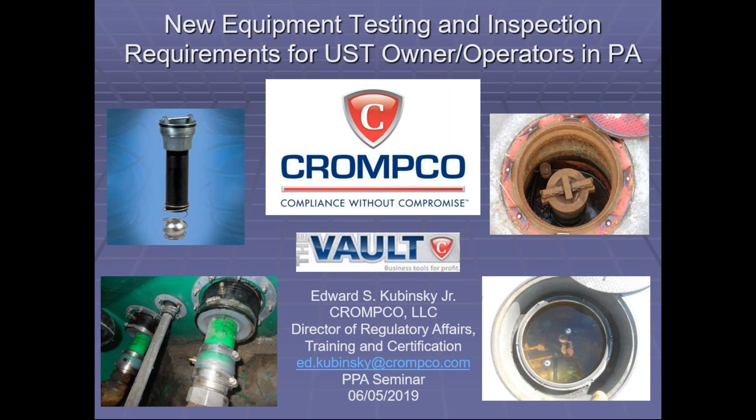All right, thanks everybody for attending. I have quite a few slides to go through here and quite a bit of information to get out to you. So we're going to be moving pretty fast through the presentation because I want to keep some time at the end for the Q&A.

And Pennsylvania is what we call an SPA state. So what that means is that Pennsylvania is authorized to implement their own underground storage tank program because EPA gave them state program approval - that's what SPA stands for - to operate or to run their underground tank program. And with the new EPA regulations, Pennsylvania DEP had until 10/13 of 2018 to revise and update their regulations to include all this new equipment testing and inspections that EPA included in their regulations.

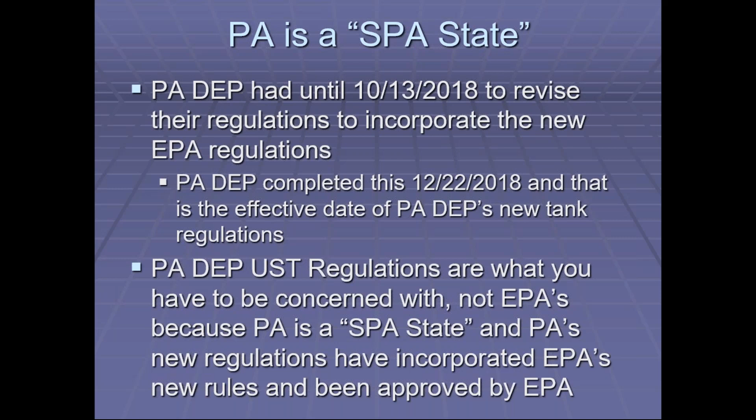A number of states - if you know anything about the regulatory process, it happens rather slowly. Pennsylvania got their new regs done and implemented on December 22nd, 2018. So just a few months ago is when the new Pennsylvania regulations went into effect. And the Pennsylvania regulations are the only thing you guys need to be concerned with. Everything that was included in the EPA regulations is now included in Pennsylvania DEP's regulations, so you don't have to worry about two sets of regulations.

Now we're going to get into it. Pennsylvania DEP's rules are Chapter 245. And the first thing I want to talk about is certified companies and certified individuals. In Pennsylvania, they have a pretty rigorous certification program for people doing work on underground storage tanks. And you as owner-operators need to know that you need to only be hiring certified companies and certified individuals to do the work. Don't be afraid to ask the company that you're hiring to provide their certification information. That should be very easy for them to do. So both the companies and the individuals doing the work need to be certified.

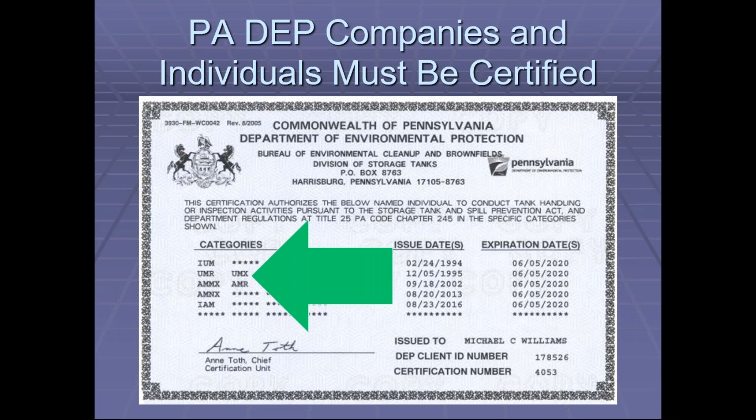This is an example of one of our individual certifications, and as you can see on the left-hand side here, there's a number of categories within the certifications that you can have with DEP, and I'm going to get into some of these important categories in a moment here.

So understanding the underground storage tank certification categories, the ones we need to be concerned with are right here with the new regs. UMX is the underground storage tank installer. UMI is a new certification category that allows an individual to do minor modifications that do not include excavation, so containment sump repairs and things of that nature that don't require excavation to do the work. If excavation is required, you need to make sure a UMX is doing the work.

UMR is underground tank remover, so if you're removing tanks, you need to make sure you're hiring a UMR individual. UTT is underground tank tester, so that's the testing category, and you'll see everything that's included in that coming up. And IUM is the underground tank inspector category, so that's the guy that comes around every 3 years and does your facility operations inspection for you.

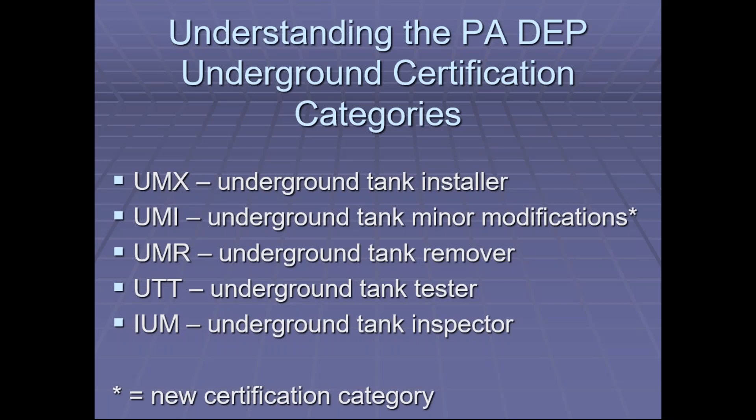The focus today is all this new testing, equipment testing, and inspections that need to be done. One thing I want everybody to be aware of is that you can go online to the PA DEP website, and you can put in your facility identification number to see what the DEP knows about your tank system.

I encourage you as owners to look at that periodically to make sure it's up to date and accurate. It's also something certified individuals can use when doing work at underground tank sites—they can see what should be at the facility and compare it to what they actually see when they're out there.

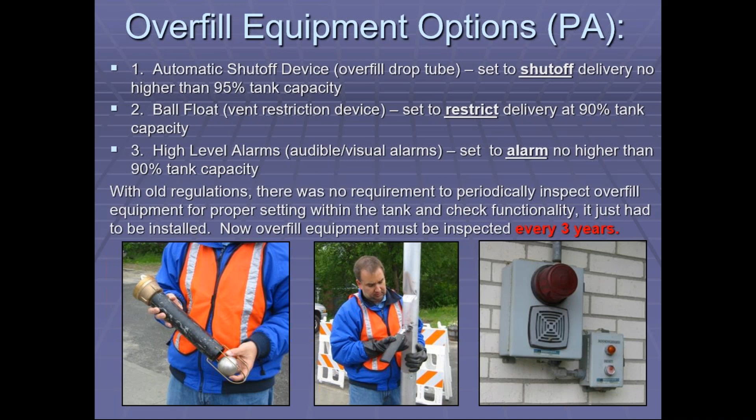Once again, overfill equipment is going to need to be inspected once every 3 years moving forward.

Here's a little picture of a tank. That first arrow is your stage 1 vapor recovery riser, or vent extractor—that's where your ball float would be installed. You can see the flapper valve, or automatic shutoff device, installed in the fill, which is where your delivery drivers fill your tanks. The high-level alarm would be attached to your automatic tank gauge, so as the float moves up, it would set off the outside audible alarm.

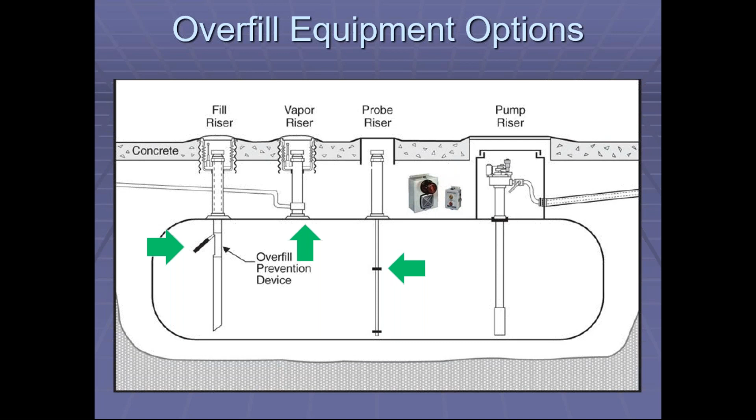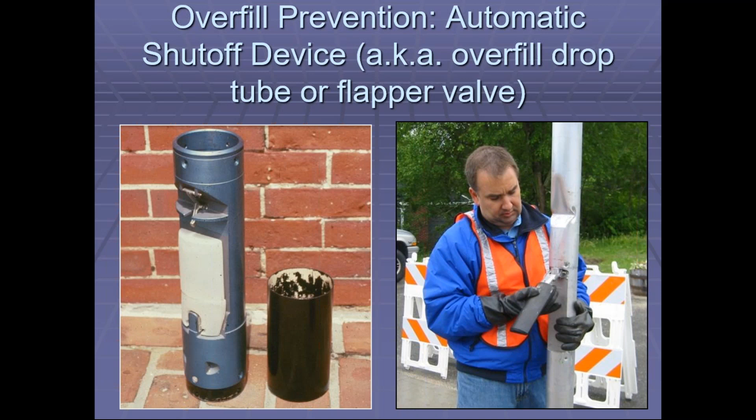So how do you inspect the overfill equipment? This is covered in Chapter 7 of PEI RP 1200. If we are doing an overfill inspection on an automatic shutoff device, a drop tube, we're going to remove and inspect the drop tube for damage. It needs to come out of the tank unless the manufacturer has a procedure for testing and inspecting the drop tube while it's installed in the tank.

You can follow manufacturer's guidelines for doing that. But we remove it from the tank and inspect it for damage, make sure the floats move freely, make sure any latch mechanisms work.

If there's a bypass valve, we make sure it's open. One of the critical parts is measuring the drop tube to make sure that it shuts off at 95% in that tank. Common problems we see with drop tubes: sticks being broken and remaining inside the drop tube. That will defeat the flapper valve. It will never work if the stick is still in the drop tube.

Improper measurements is one we see quite often as well. They're set well higher than 95% tank capacity. That would be out of compliance.

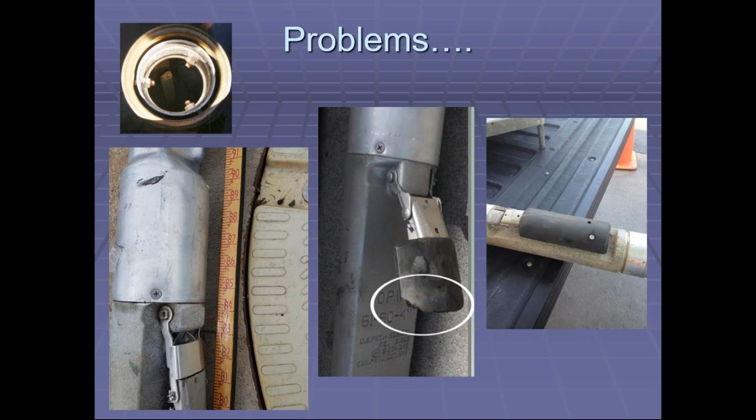And then broken flapper valves, we see them periodically as well. Here's a picture of one that was installed in a tank for only 6 months. We removed it to take a look, and as you can see, the flappers are gone, so there was never any overfill protection in that tank.

So that's kind of the reason why these inspections are being done with the new regulations, because the equipment doesn't last forever. Things break, things get damaged. They need to be checked periodically to make sure that they're still working.

Pass-fail criteria, it's pretty simple. If the automatic shutoff device functions as designed and complete product flow is shut off at 95%, it passes the inspection.

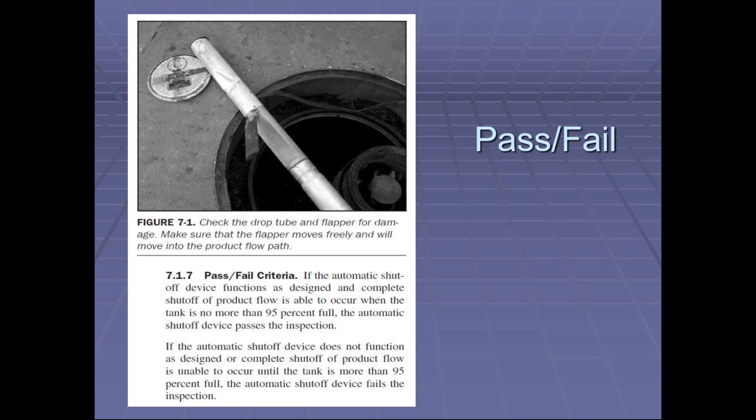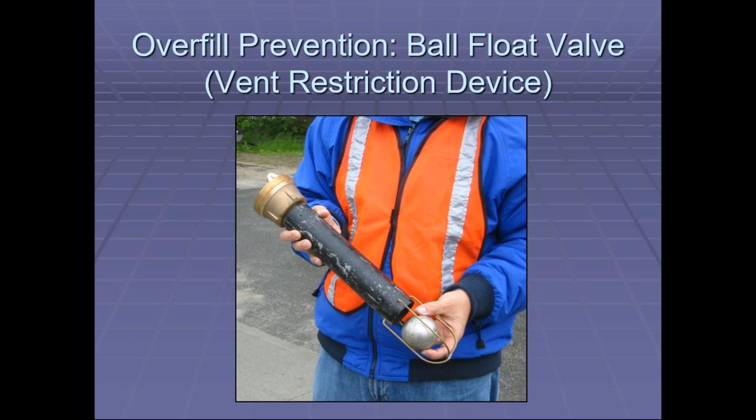Moving on to ball floats. When we're inspecting ball floats, this is what a ball float looks like, many of you may not have seen it. They've been installed many years in the tanks, and for a long time they may be difficult to remove. So we remove the ball float and inspect it.

We check the ball for holes or cracks. We make sure that the vent hole, there should be a small vent hole toward the top of the device, make sure that it's open. We need to measure for 90% level and make sure that ball is restricting delivery at 90% in the tank. We also need to visually verify that all tank top fittings are vapor tight.

PEI RP 100, 1200, many of the PEI documents recommend removal of the ball floats because they've caused problems over the years. So there's a lot of recommendations to remove them. However, if you have them and they're functioning properly and they're inspected, they pass the inspection, you can continue to use ball floats indefinitely. You don't have to remove them if you have them.

As long as they are set up properly for your tank configuration and pass their inspection every 3 years, you can continue to use them. However, after 10/13 of 2018, you may no longer install ball floats in your tank for overfill protection. So with the new regulations, anything new going in the ground, you cannot use ball floats for overfill protection. So don't install them.

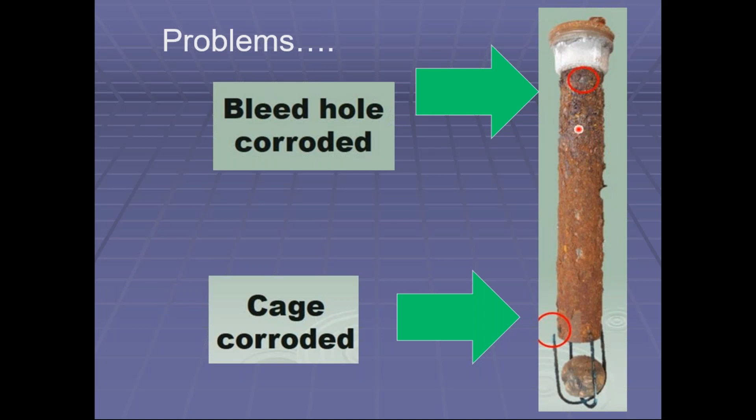This is what they can look like after many years of being in the tanks and never inspected. Cages corroded. That bleed hole that I talked about is corroded, it's not open. There are all different types of sizes of ball floats.

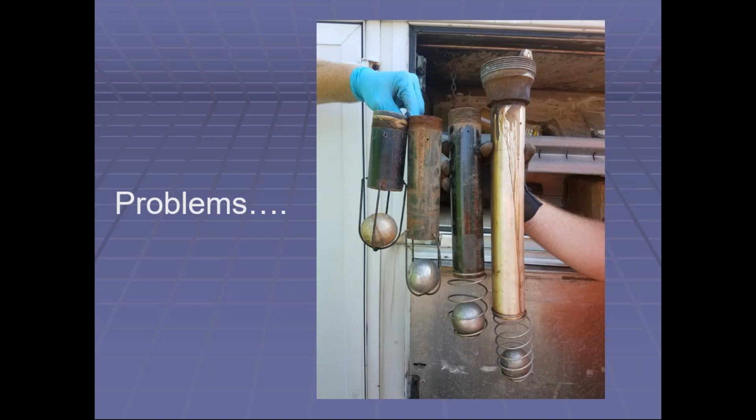We've seen many tanks where they have very short ball floats in the tank and they're not set at 90%. They would need to be removed, and another form of overfill protection would need to be used if we find a ball float that's too high in the tank.

Pass-fail criteria: basically, if the visual inspection of the ball float after you remove it from the tank passes, it functions as designed, and we measure it, and restriction occurs no higher than 90% tank capacity, and the tank top fittings are vapor tight, it passes the inspection.

However, if any of the following configurations exist, and this is all in RP 1200, the ball float would fail the inspection.

The one that I have highlighted there is the ball float cannot be removed from the tank. So if you do have ball floats that have been in there for 20 years or so and never removed, it is a possibility that ball float might not be able to be removed without some excavation. Many companies have easy-outs and tools to get them out, but there are times that they can't be removed and excavation is required.

In that case, you would have to get rid of the ball float and go to another method of overfill protection.

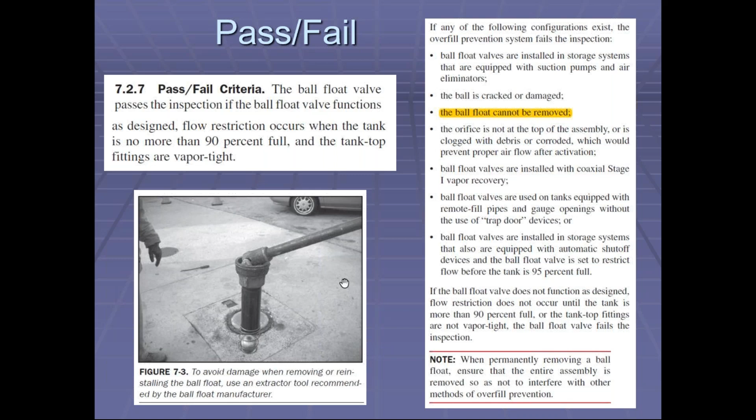So as fuel is being delivered to the tank at 300 gallons per minute from your delivery driver, the fuel level rises before it ever hits the flapper valve. If that's set at 95%, it's going to hit that ball float tube, and 300 gallons per minute is going to be shooting up into your vent line and come squirting out your vent. That's why we don't want contractors just knocking the ball out, forgetting it's there, and installing a drop tube. Make sure your contractors aren't doing that, because they're not doing a service. There's a potential, if the fuel level gets high enough in the tank, that fuel is going to come squirting out your vent. So don't knock the balls out of the tank.

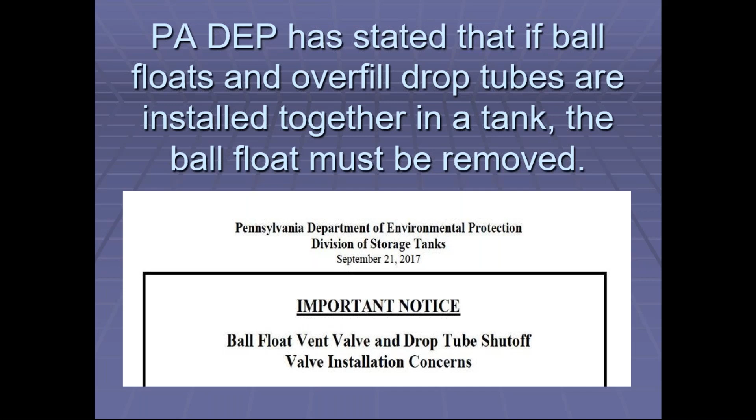Pennsylvania DEP also has a guidance document out there that says if ball floats and drop tubes are installed together in the same tank, the ball float must be removed. Make sure your contractors know that as well. If those two devices are in the tank, the ball float needs to be removed because it can interfere with the function of the drop tube flapper valve.

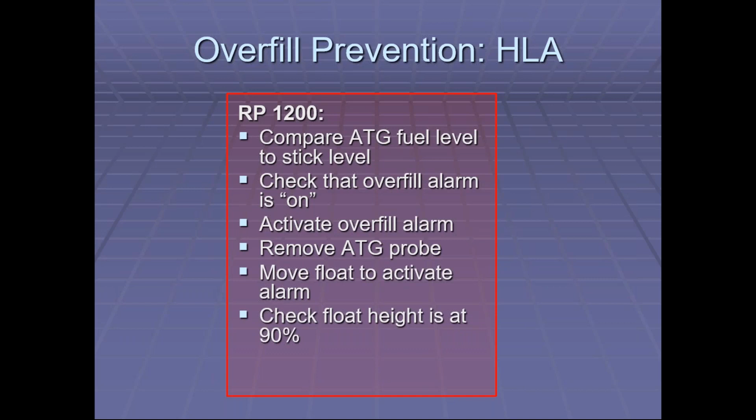All right, moving on to a high-level alarm. If we're inspecting that high-level alarm, we're going to compare the automatic tank gauge fuel level to the stick level. We're going to make sure that overfill alarm is on in the programming. We're going to activate the overfill alarm by removing the automatic tank gauge probe from the tank. We're going to slide the float up to activate the alarm. We're going to measure again and make sure that the float is at 90% when that alarm goes off. And that's pretty much it.

You can see there's a typical tank probe removed from the tank. You see us measuring, and we're measuring that top float to make sure it sets off that outside alarm at 90%. So if the inspection of the probe and the float is all good, the alarm goes off at 90%, everything's good, and the high-level alarm passes the inspection.

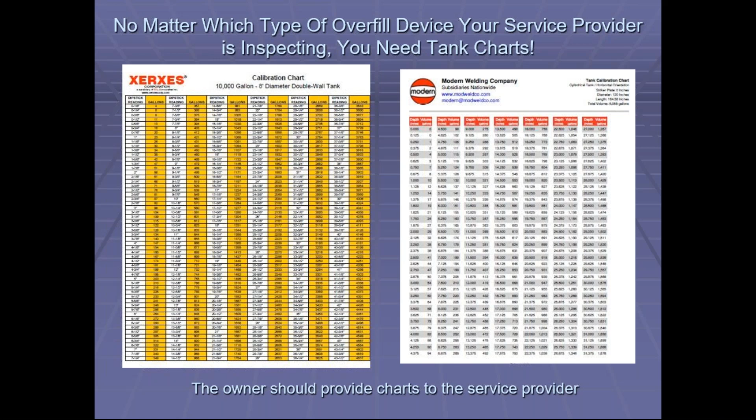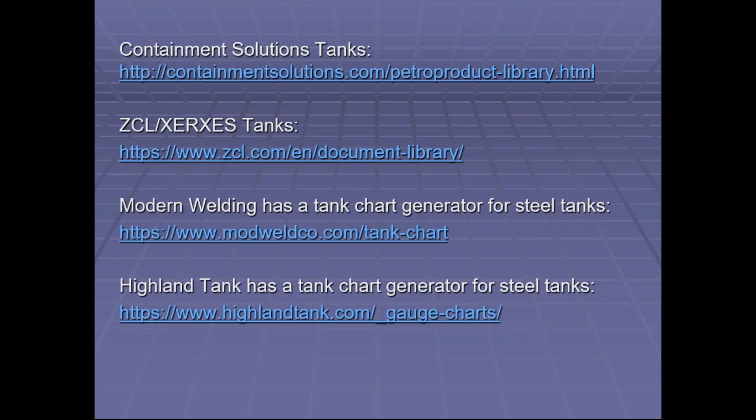One thing you need to know, no matter what, whether we're doing a flapper valve, ball float, or high-level alarm, you really need to provide your service provider with the tank charts for your facilities. Hopefully you have that on file. If not, you can contact your tank manufacturer, or go to some of the tank manufacturers' websites. They have many tank charts available in their libraries. There's also a way to generate tank charts for steel tanks, and all that can be done online right here. But bottom line is, make sure you have a tank chart you can provide to your service provider so they can do their job. They need to use that tank chart to determine where 90 and 95% is in the tank system.

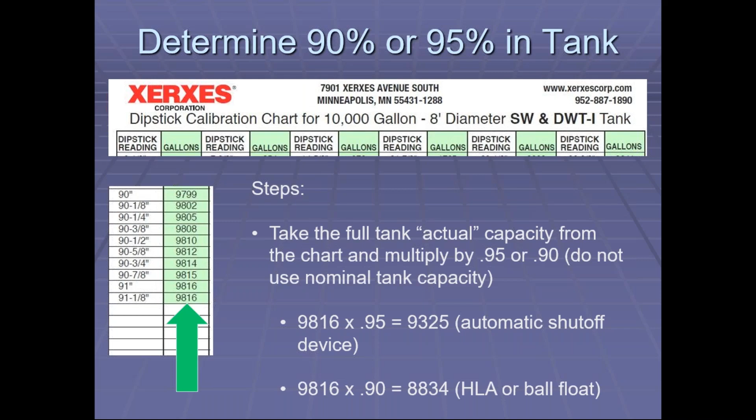Pennsylvania DEP also did a real good job of making new forms to document all these new inspections and testing that need to be done. So whoever is doing your overfill verifications needs to document this on the Pennsylvania DEP form. If the company doing the work has their own form, that's fine, but when the 3-year facility operations inspection occurs and your inspector comes around, they are going to be looking for the Pennsylvania DEP forms. These tests must be documented on the PA DEP forms, or you might have a problem with your 3-year inspection. Pennsylvania DEP is training all of the certified individuals right now that they should be looking for these forms when they're doing their inspections.

One thing to note here, the PA DEP certified individuals that are able to do the overfill inspections are only the UMX and the UMI individuals. So the UTT, the IUM, and all those other certification categories, those individuals are not eligible to do the overfill verifications. It must be a UMX or UMI certified individual.

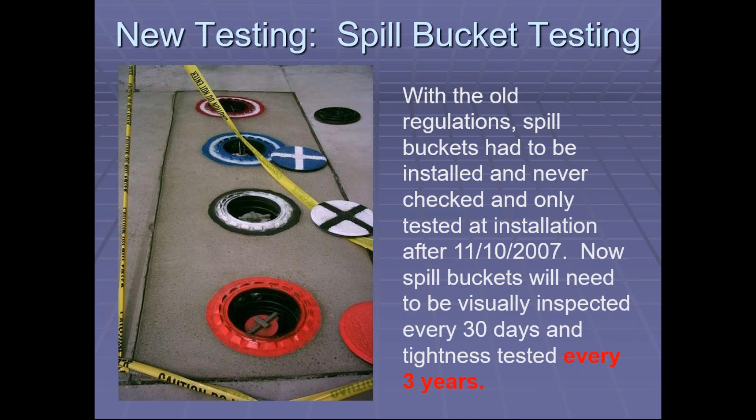All right, we're going to move on to spill buckets now. With the old regulations, spill buckets had to be installed and never checked, only tested at installation after 11/10/07. Now your spill buckets are going to need to be visually inspected every 30 days with these walkthrough inspections, but they're also going to need to be tested once every 3 years. Chapter 6 in RP 1200 covers this: containment testing and spill bucket testing.

Anything installed after 11/10/07 should have been tested at installation. Now it needs to be done every 3 years, unless you install a double wall spill bucket and you're monitoring that interstitial space every 30 days. That can get you out of the testing. The key is documenting that you are checking that interstitial space every 30 days, just like if you had double wall tanks or lines, you'd need to monitor the interstitial space once every 30 days.

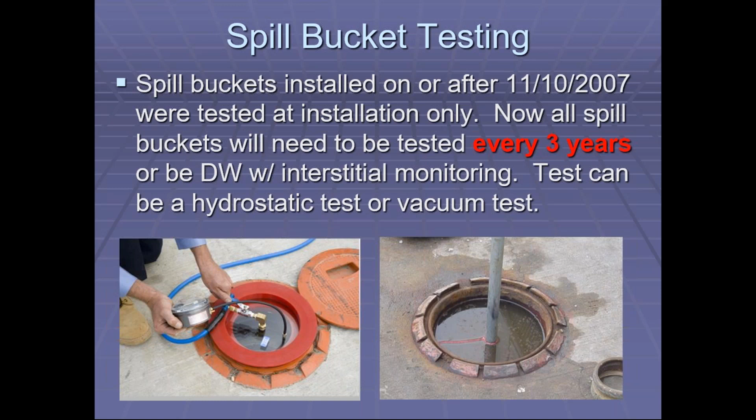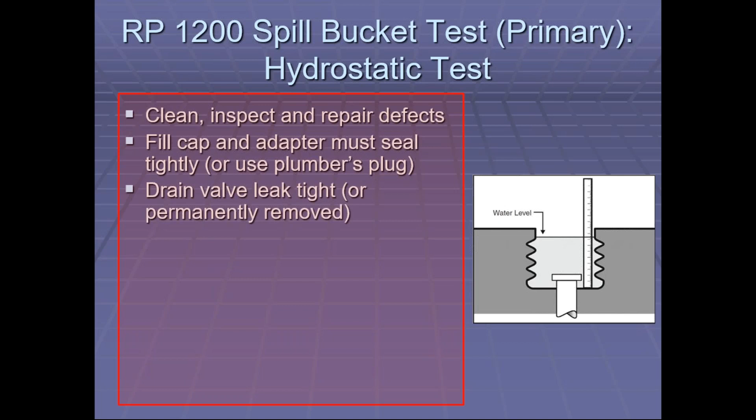If we are testing the spill buckets, it can be a hydrostatic or a vacuum test. For hydrostatic testing: clean, inspect, repair any defects with the spill bucket. Make sure the cap and adapter are sealed tightly, or use a plumber's plug to isolate the tank from the spill bucket. Make sure any drain valves are leak tight or permanently plugged or removed. We fill the spill bucket to within 1.5 inches of the top of the bucket.

We measure it to a 1/16 of an inch. We wait 1 hour, and as long as that water level drops less than 1/8 of an inch over the course of an hour, the bucket passes the test. If the water level drops 1/8 of an inch or greater, the spill bucket is considered a fail.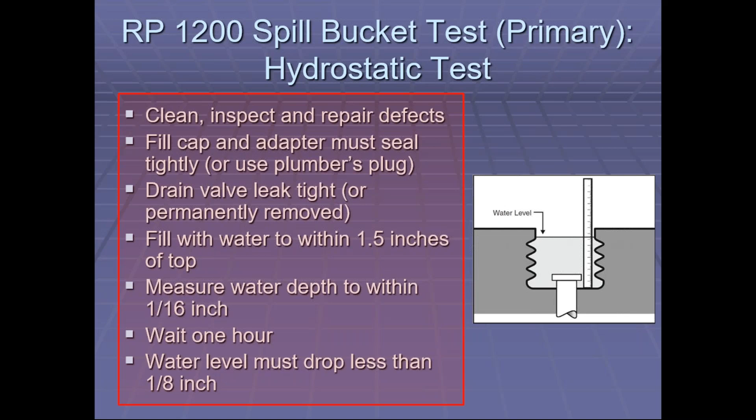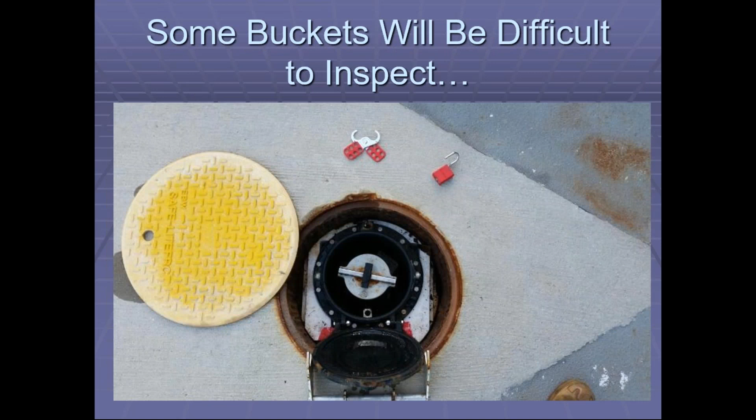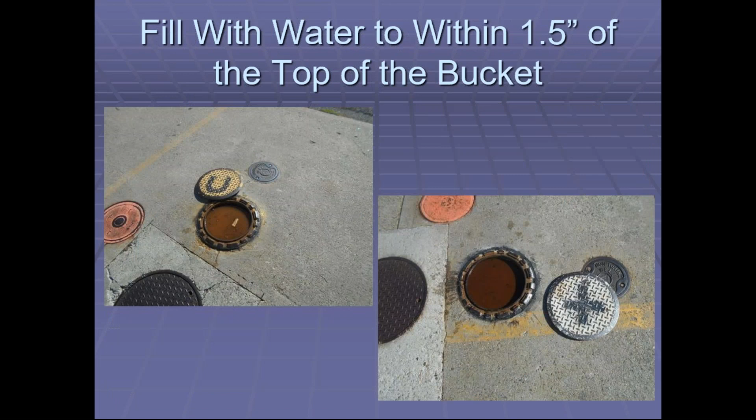So once again, take a look at the spill buckets—this is something you're going to need to start doing once every 30 days. You need to take a good visual inspection of that spill bucket, make sure it can pass a test. Look for any cracks and holes in the bucket. This should obviously be handled immediately. Some of the older buckets are a little more difficult to inspect—you can't get in there to see everything, but you need to do the best you can when inspecting these spill buckets. Here's what it looks like when the spill bucket is filled up to within 1.5 inches of the top.

I also mentioned that we can do vacuum testing of the spill buckets. The advantage of the vacuum test is that it's a lot quicker—it's a 1-minute test instead of a 1-hour test. Another difference is you don't need to use water to do a vacuum test, so you don't have to worry about proper disposal of that petroleum contact water that you'd have with a hydrostatic test of the spill bucket.

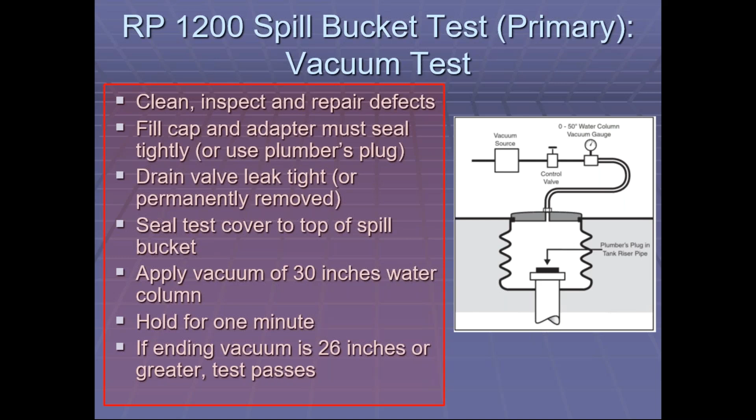The disadvantage of a vacuum test is that it's a little harder to pass. You're pulling about 1 psi of vacuum throughout the entire bucket, and it has to maintain that vacuum for 1 minute. So basically, we do the same thing: clean, inspect, repair, make sure the caps and adapters are tight, drain valves removed or plugged. We seal our test equipment to the top of the spill bucket and apply 30 inches of water column vacuum, equivalent to about 1 psi. It has to hold for 1 minute; if the vacuum level drops below 26 inches of water column vacuum, it fails the test. As long as it maintains 26 inches or higher, it passes.

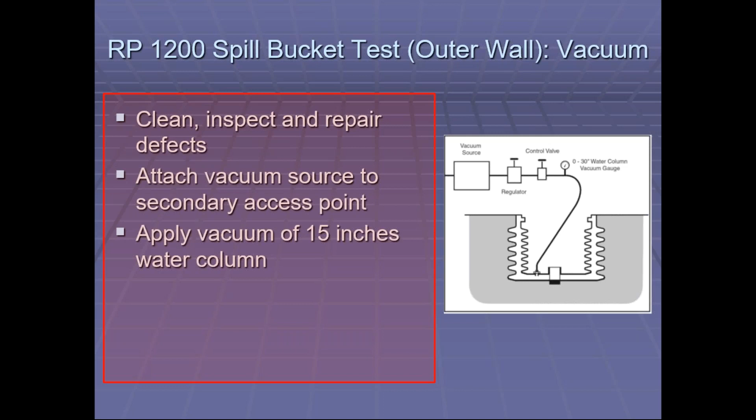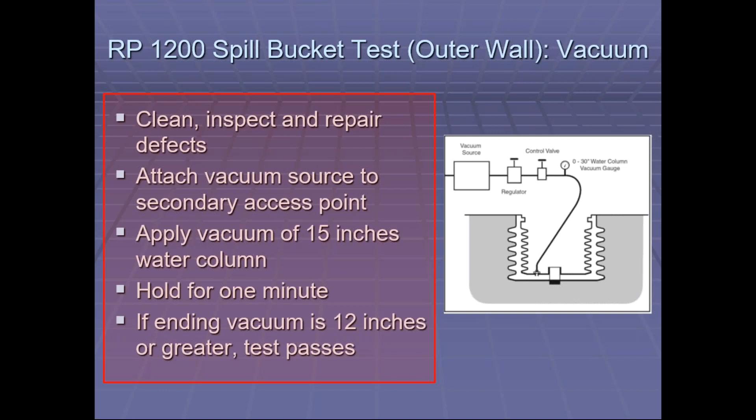If we have a double wall spill bucket and need to test that interstitial space because it's not being inspected every 30 days, again we clean, inspect, repair. We attach our vacuum source to the secondary of the spill bucket and apply only 15 inches of water column vacuum, about half a psi, to the interstitial space. It's a 1-minute test, and as long as the ending vacuum level is 12 inches or greater, the test of the interstitial space passes.

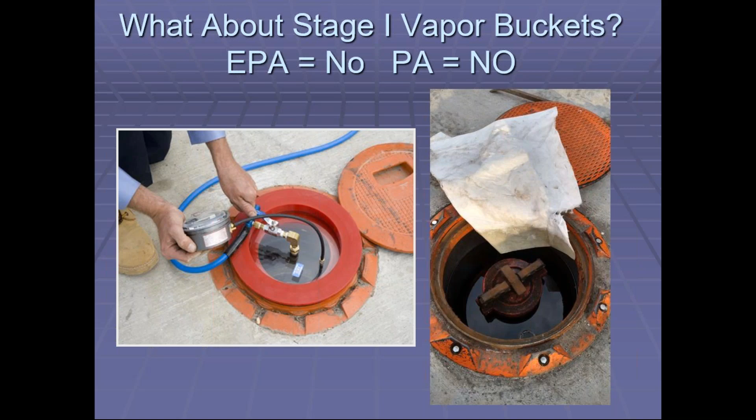So you may ask yourself: I also have spill buckets around my Stage 1 gasoline vapor recovery port—do I need to test that bucket? According to the EPA and Pennsylvania DEP, that bucket does not need to be tested every 3 years. Only the fills used where your delivery driver connects to fill the tank are the buckets that need to be tested. It is optional to test the other buckets—it's not a requirement. Again, Pennsylvania DEP has a form for documenting spill bucket testing, and that form must be used by your service provider.

The certified individual is eligible to do this work, just like the Overfill, UMX and UMI individuals, they can do this testing. But you also have UTT certified individuals, and also IUM inspectors can do this test. So many more certified individuals are available to perform spill bucket testing.

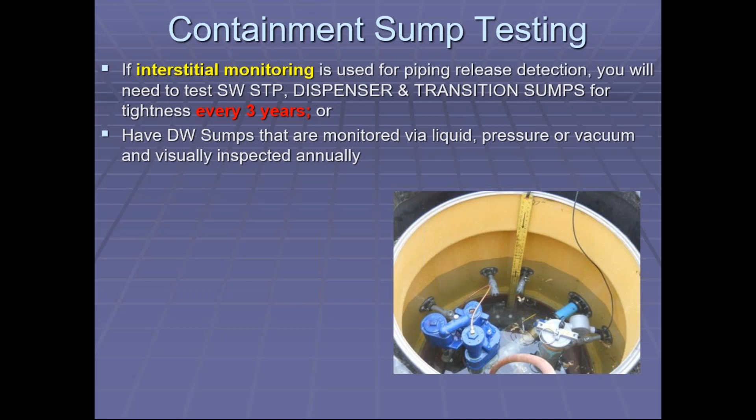So if you are using interstitial monitoring for release detection, and that's your primary or only method of release detection, you're going to have to test your sumps every 3 years.

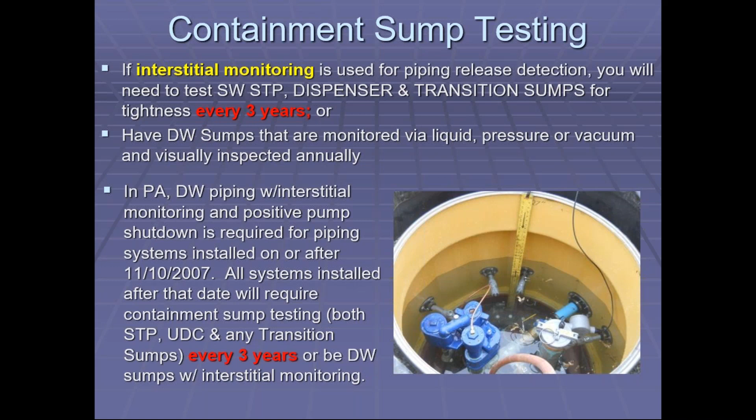Just a note, in Pennsylvania, double wall piping with interstitial monitoring and positive pump shutdown has been a requirement for new systems installed on or after 11/10 of 2007. So if you modified your piping or put in new tanks and piping after that date, you are required to do interstitial monitoring, and you are going to be required to test your containment sumps every 3 years. So all systems installed after that date are going to require containment sump testing every 3 years. Make note of that.

It is very critical for you to know what method of release detection you're using for your piping. If your piping system was installed prior to 11/10 of 07, you have other options other than interstitial monitoring. You may have installed double wall piping prior to 11/10 of 07. If that's the case, you can use other methods of release detection other than interstitial monitoring.

You can do an annual line test. You can have electronic line leak detectors doing a 0.2 monthly test, an electronic leak detector doing a 0.1 gallon per hour annual test, or you can be doing SIR for your piping release detection, as long as that double wall piping was installed prior to 11/10 of 07.

No sump testing would be required if you're using one of those methods of release detection and your piping was installed prior to that date.

Single wall piping requires no containment sump testing whatsoever. You can't do interstitial monitoring on single wall piping, so that's not even an option for release detection, so no sump testing is needed even if you have containment sumps at your dispensers and tank sumps.

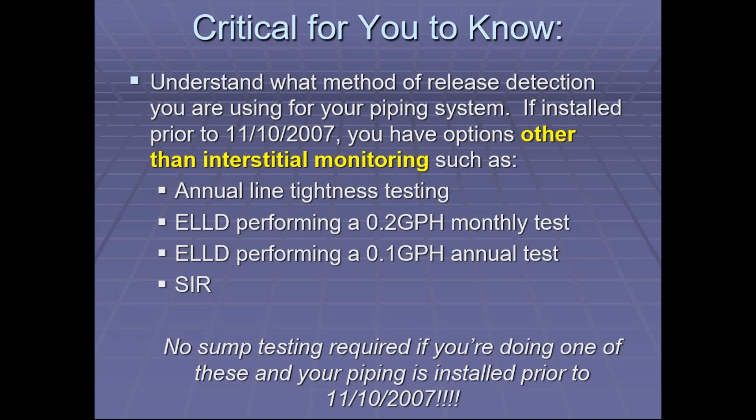If we are doing containment sump testing according to RP 1200, the way it's done is we do a good visual inspection of the sump, clean, inspect, and repair any defects. You have to fill the sump with water 4 inches above the highest penetration or side wall seam.

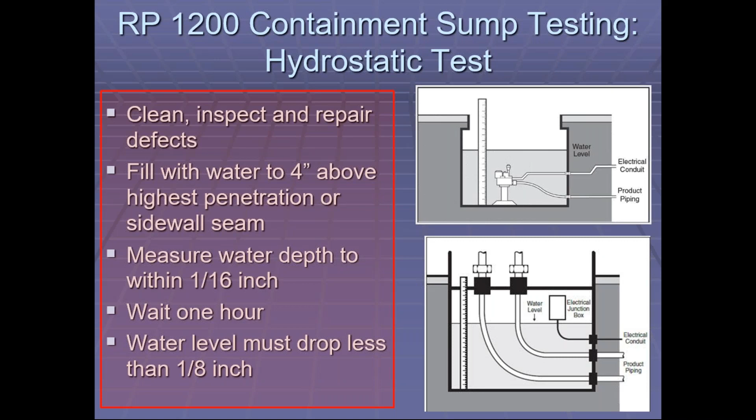Again, we measure to within a 1/16 of an inch. It's a 1-hour test, and same as spill buckets, as long as that water level does not drop 1/8 of an inch or greater, it would pass the test. So that's the pass-fail threshold, 1/8 of an inch. If it drops 1/8 of an inch or greater, the containment sump would fail the test and you would need to look to do some repairs to your containment sump.

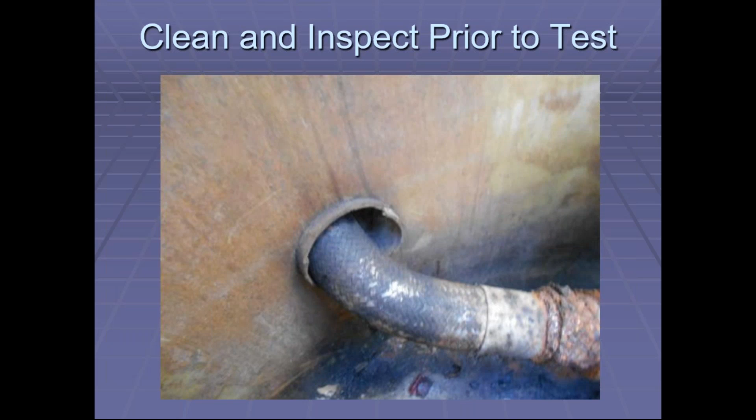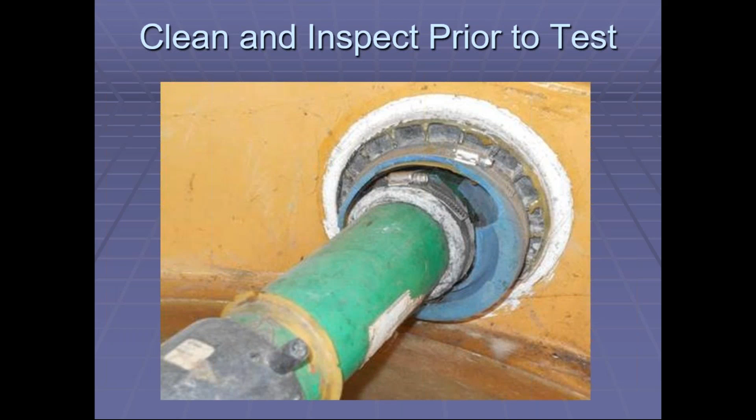So again, we need to do a good visual inspection. We need to be able to isolate the piping in your containment sumps. We can't leave interstitial spaces open. Cracked boots that have been around for many years, that's oftentimes a problem. These penetration boots that are cracked and broken could be a problem as well. We need to be able to isolate all that so that we can fill the containment sump with water and it's not going to leak out through these penetration fittings.

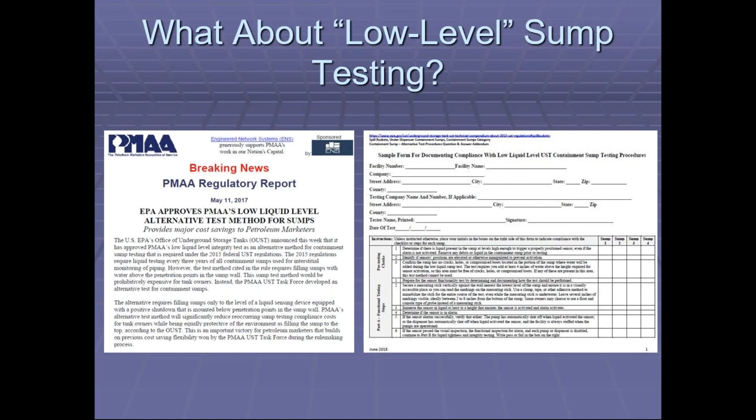Many of you may have heard about some low-level containment sump testing in other states. It is an option in other states to do some low-level testing if you had certain equipment installed and programmed in your sumps. However, Pennsylvania DEP is not allowing low-level hydrostatic testing at this time, unless it becomes incorporated into PEI RP 1200.

PEI RP 1200 Chapter 6 is open for public comment right now. They are looking at a low-level test protocol being incorporated into the document. We still have about 2 weeks, a little less than 2 weeks, before the end of the public comment period. You could go to www.pei.org/RP1200 if you want to submit comments on the protocol. But as of now, there is no low-level hydrostatic testing in Pennsylvania.

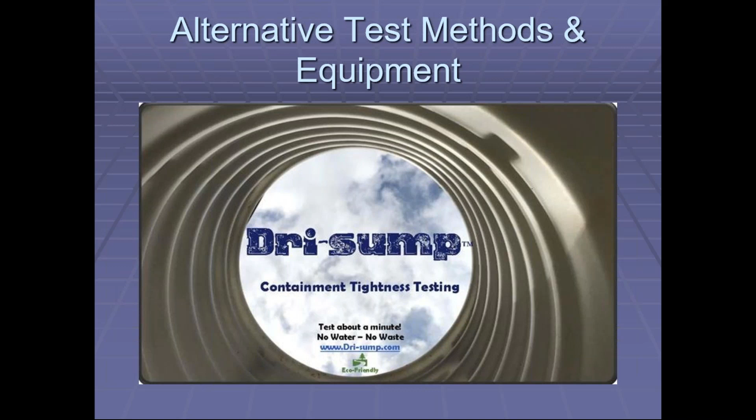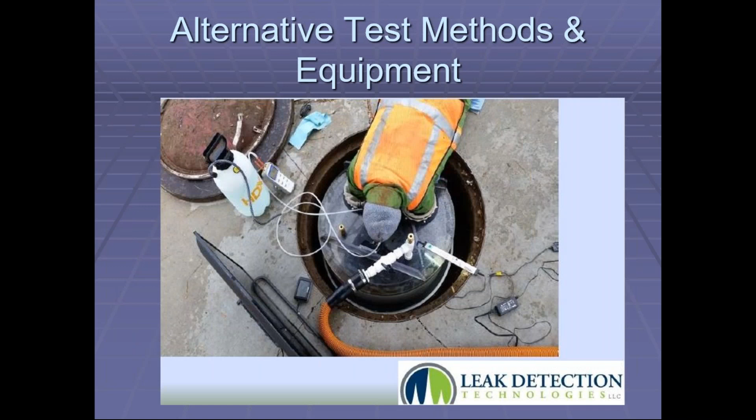There are other alternative methods to testing sumps without water. There's Dri-sump testing, and there's leak detection technologies. I just want to make you aware of a couple of these other options. They're not widely being used, they're relatively new to the industry, but they are out there. There is also some other quicker testing electronic equipment that can perform hydrostatic testing.

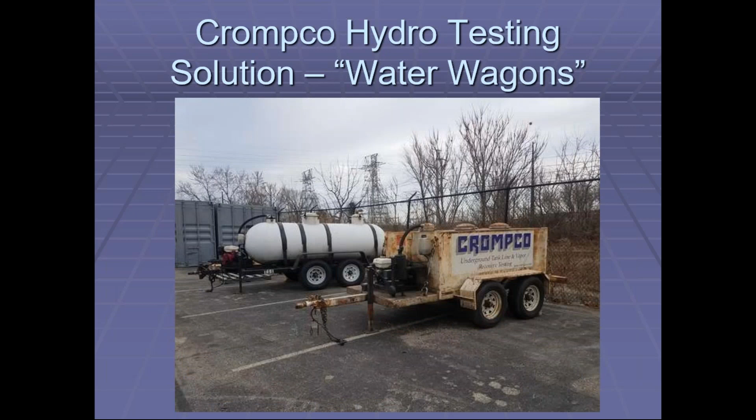Test liquid handling before and after containment sump and spill bucket testing. What we use is what we call water wagons. We trailer about 500 gallons of water to the site, use the water for the testing, and then remove the water after the test is completed. Here's some pictures of our trucks and trailers. We have a potable water tower here at our yard in Plymouth Meeting where we fill up the trucks, and we have a 5,000 gallon trailer that's used to dispose of the dirty water.

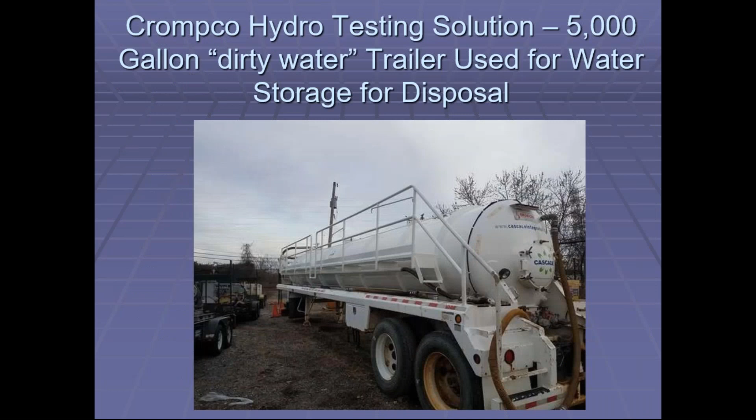Here's some pictures and video of some containment testing being done at a site. We're visually inspecting and measuring, putting a measuring stick or tape measure in the containment sumps prior to introducing the water.

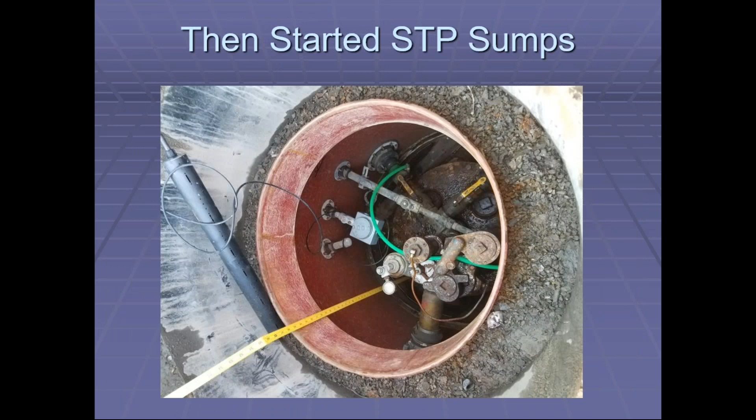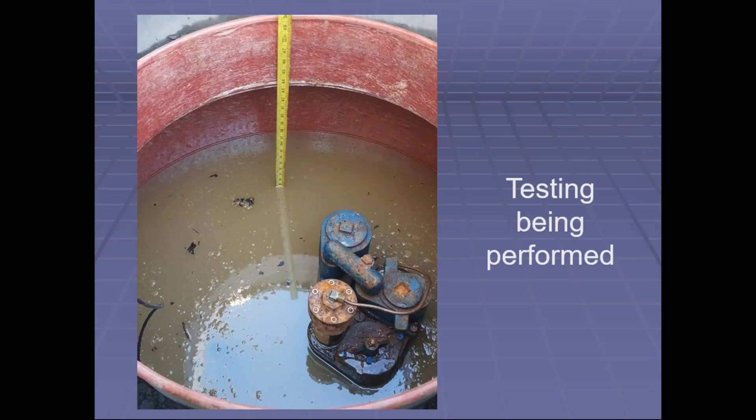And here we go, introducing the water into a tank sump to perform a hydrostatic test. Make sure all the penetration boots are tight, all interstitial spaces are closed off. Obviously, we pull the sensors out of the sump. We don't want to put the sensors into alarm, so we need to take those out of the sumps, and then we fill the sump to within 4 inches above the highest sump penetration or sidewall seam. This is what it looks like when we're doing the test.

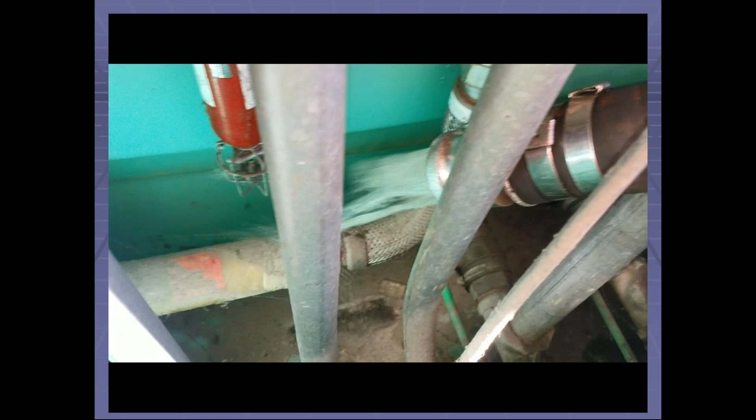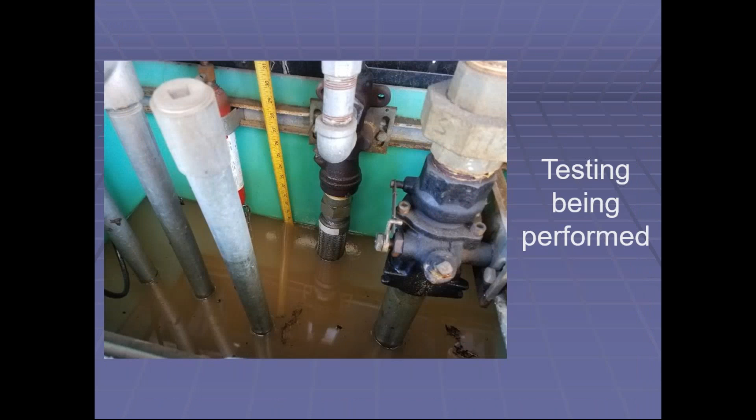We also go out and do the under-dispenser containment sumps. Need to do a good visual inspection under the dispensers and take a look at those sumps prior to doing the test. Here we are inspecting, and after we're done inspecting and making sure everything looks tight, we're dropping the water into the sump. Here we are doing our under-dispenser containment sump test.

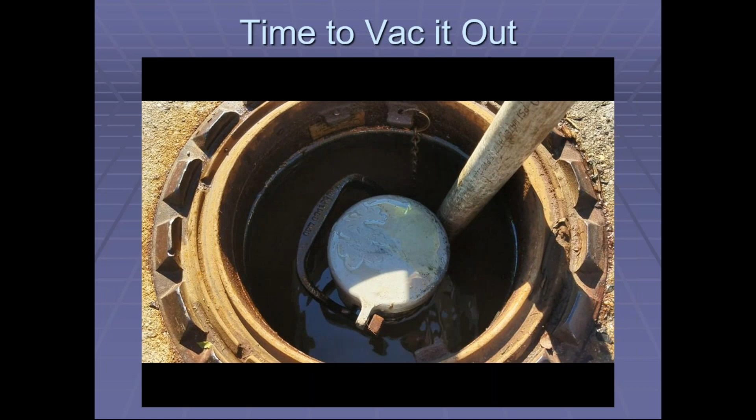Again, after we do the testing, we vac it out. Some companies have a vac truck come out and vac out the water after containment testing is done. Talk to your service provider and see how they handle that. There we are vacing out the tank sump.

Again, documentation. Pennsylvania DEP has forms now that need to be completed to document containment sump testing. Make sure your service provider is using these forms. DEP certified individuals able to do this testing, again, are the UMX, the UMI, the UTT, and the IUM. They all can do containment sump testing.

Moving on to automatic tank gauge and leak detection functionality testing. So moving forward, we're going to need to test the automatic tank gauges, and all equipment being used for leak detection is going to have to be tested for proper operation on an annual basis. So unlike the spill buckets, overfill, and containment sump testing, which are done once every 3 years, your ATGs, sensors, and leak detectors have to be tested on an annual basis, okay?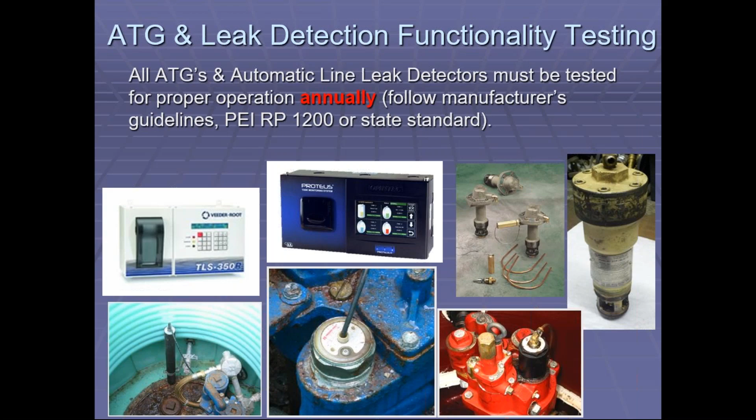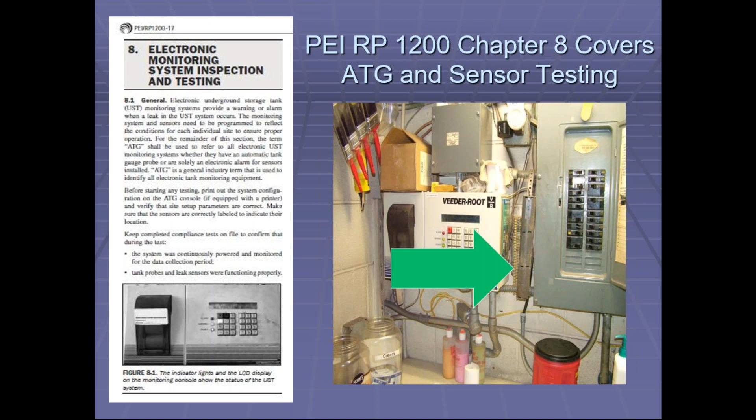Chapter 8 in RP 1200 covers testing the automatic tank gauges and all the sensors. Here's obviously not where a sensor is supposed to be. It should be in the tank sump, but that sensor was connected to the tank gauge. As you can see, this sensor was not properly positioned.

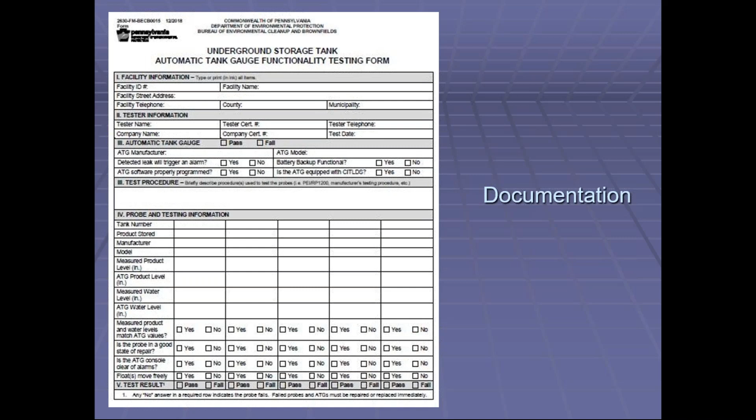One note: make sure you never ignore any alarms, never manipulate, disable, or move sensors out of where they're supposed to be installed so that they don't alarm when they're supposed to alarm. Those sensors are there for a reason, to detect problems and notify you when there is a problem, and that's when you should investigate it. Don't fudge with your dispensers or with your sensors. Pennsylvania DEP also has a form for documenting the ATG and sensor functionality testing.

Mechanical and electronic line leak detectors: you have to do a 3 gallon per hour at 10 psi test on your automatic line leak detectors that are installed on pressurized piping. Chapter 9 in RP 1200 covers how to do that. Again, DEP has a form for that, so make sure your service providers are using the appropriate forms. The individuals able to do this work are again the UMX, the UMI, the UTT, and IUM. Pretty much everybody can do it.

One thing to note here: when your certified tester is performing spill bucket testing, overfill testing, and containment sump testing, I want you to be aware that DEP requires certified individuals to report failures to the regional office within 48 hours. We as testers are obligated by regulations to notify DEP when any of those pieces of equipment fail within 48 hours, and we need to send in the test report to do that. So you can expect some pretty quick follow-up from PA DEP when we find issues. You're going to want to get your repairs in order and managed rather quickly.

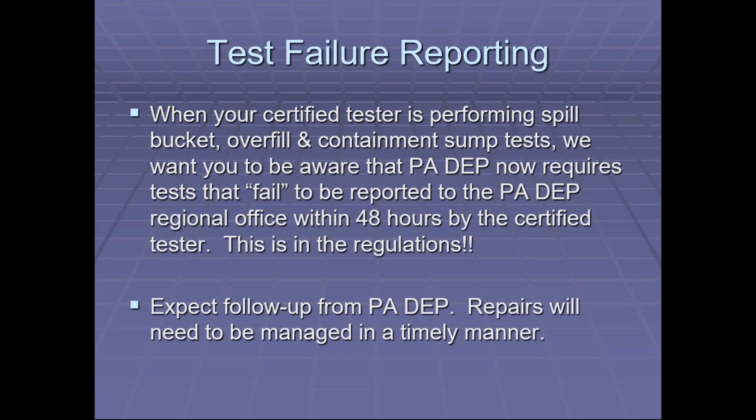So the next thing I'm going to talk about with these new regulations are walkthrough inspections. We're going to have to do 30-day walkthrough inspections and annual walkthrough inspections, and you're going to need to document these. For your 30-day walkthrough inspection, you're going to need to take a look at your spill buckets every 30 days.

You're going to need to look at the spill bucket and make sure there's no damage, no cracks, no holes in the sides or bottoms of the spill bucket. Make sure there's no broken tank sticks in the fill. Make sure the cap and adapter is in good condition. Make sure you remove and properly dispose of any liquid or debris in the spill buckets. The buckets are supposed to be kept clean and dry at all times, and it's very easy for an inspector to write you up a violation if you have liquid or debris in your spill buckets. You need to keep them clean and dry at all times.

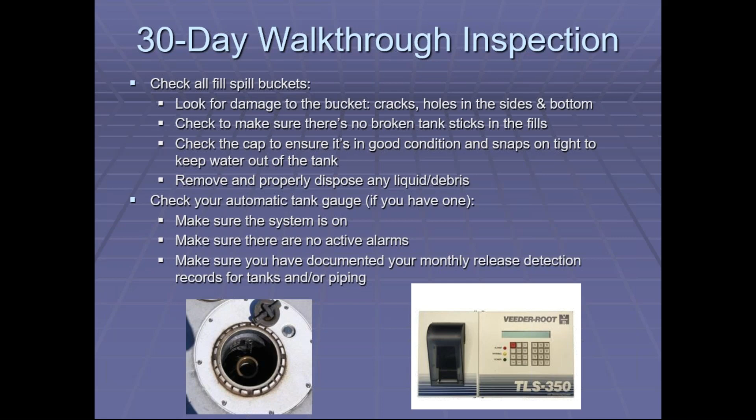Next thing you need to do every 30 days is take a look at your automatic tank gauges. You need to make sure that the system's on, make sure there's no active alarms, and make sure you've documented your monthly release detection records for your tanks and/or your piping. This is something you should be doing every 30 days already. It's nothing that's that new. You should be doing it. The key is making sure that you document that you're doing that now, every 30 days.

A couple other things to note: with PA DEP's old regulations, they required monthly sump visual checks for double wall pressurized piping. That's no longer required if you're doing interstitial monitoring for your piping release detection and you have sensors that are continually checking your sumps. You don't need to open up your dispenser sumps and tank sumps every 30 days and do a visual inspection as long as you have sensors in there doing it for you. That went away with the new regulations.

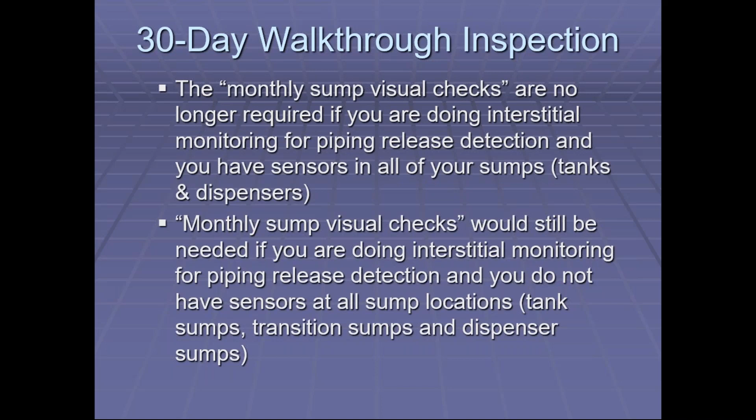However, if you're doing manual interstitial monitoring where you don't have sensors, then you would have to do your monthly sump checks by opening up the tank sumps and dispenser sumps.

With the annual walkthrough inspection, once a year, you're going to need to visually check all containment sumps. So you're going to need to open up your under-dispenser containment sumps and those big tank top sump lids. You're going to need to visually inspect them for any liquid, debris, and damage. You're also going to need to visually check your tank gauge sticks and, if you're using groundwater bailers, make sure that they're in good working condition as well. So once again, for annual walkthrough inspections, all sumps need to be inspected, and your tank gauge stick needs to be in good working condition.

Many of Crompco's customers just have us add that on to our annual visit, our annual compliance visit when we come around, but it is something owners can do on their own. You don't have to hire someone to do it, but it is going to need to be done. This is what we hope all of our sumps look like. Make sure the gauge sticks can be read down to 1/8 of an inch.

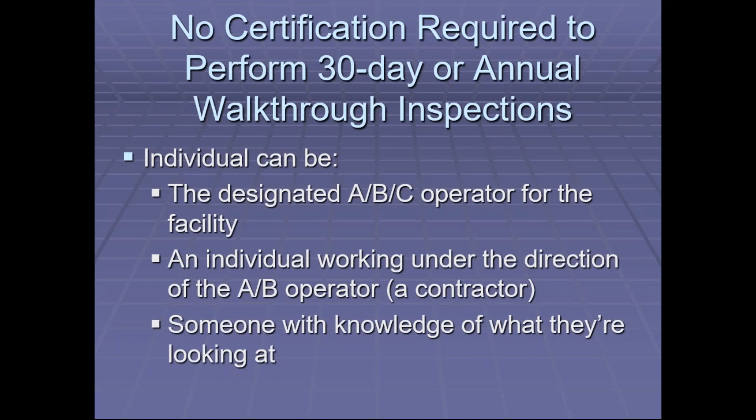There is no certification required to do 30-day and annual walkthrough inspections. They're designed for the ABC operators to do. It can be the ABC operator at the facility, or an individual working under the direction of the AB operator. So like I said, you can hire a contractor to do it, but make sure it's somebody that has a little bit of knowledge of the tank system doing these inspections.

If it's not documented, it never happened. One thing DEP didn't do: they did not develop a form for the monthly and annual walkthrough inspections.

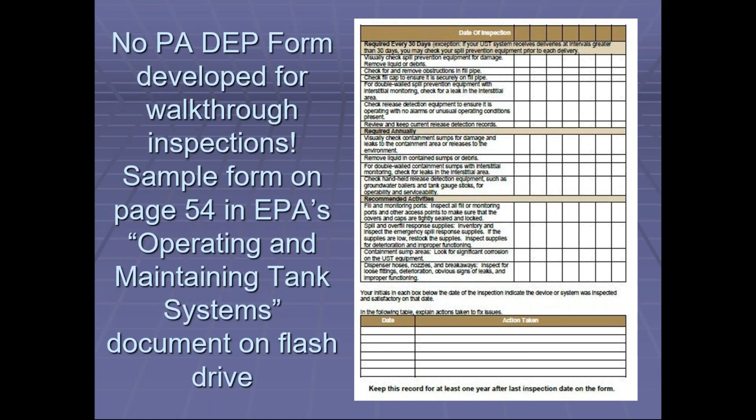There is a sample walkthrough inspection that I have. I'd be happy to email it to anybody. Or if you have EPA's guidance document, Operating and Maintaining Tank Systems, this inspection is on page 54 of that document. I can also send that document out to anybody who would like it.

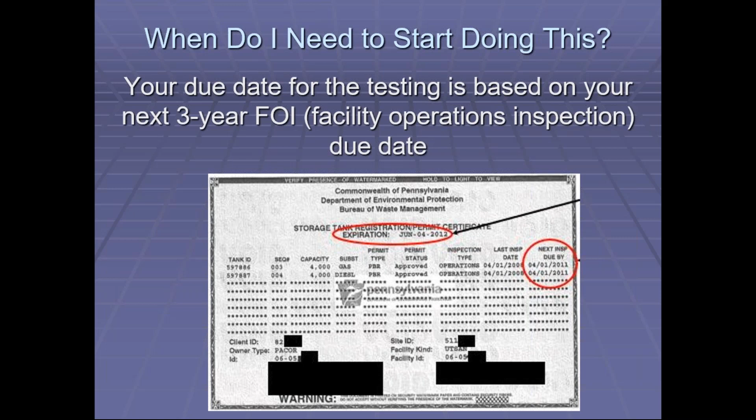So now you're probably asking yourself, okay, I need to do all this new testing and inspections, I get it. When do I need to start doing this stuff? The due date for the new testing—there is no single drop-dead due date for every facility. The due date is based on when your next 3-year facility operations inspection is due. You can go to your registration certificate and see when your next inspection is due, and that's going to help you determine when you need to do all this new testing.

So here on this slide, if your next facility operations inspection, your next 3-year inspection, is due between December 22nd of 2018—that was the date of the new regulations a couple months ago—and 12/22/2019, about 7 months out, then if your next inspection is due in that timeframe, the due date to do all the new testing—the overfill, the spill buckets, containment sump, automatic tank gauge—all of that is due 12/22 of 2021. So if your inspection is due this year, you basically have until 12/22 of 2021 to do all the new testing.

However, if your next 3-year inspection is due 12/23/2019 or later, the due date for all the new testing is prior to your next FOI due date. So by the time your next inspection is due, you will need to have done all this new testing. So if your inspection is due January 1st of 2020, you need to have done the overfill inspection, the spill bucket testing, containment sump testing if you're doing interstitial monitoring for release detection, and your automatic tank gauge test inspection—all of that needs to be done before your next 3-year inspection.

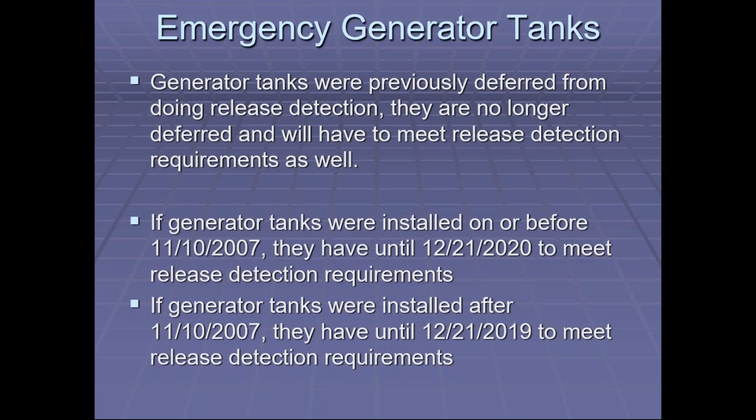They're relatively easy to put a sensor in or start doing release detection. So those tanks only have until the end of this year to start doing release detection. By 12/21 of 2019, those newer double-wall tanks have to start doing release detection on the tanks and the piping. The challenge with these tanks is doing release detection on the piping.

So some final thoughts before I get into the Q&A.

Make sure you're keeping really good records. Tank modification reports - anytime you have work done to your facility, those records need to be kept for the life of the system, and the inspectors are asking for them now.

DEP is really hammering home with the third-party inspectors to be looking at these records. Keep your most recent facility operations inspection, that last 3-year inspection you have. Make sure you have 12 months of tank and piping release detection. Make sure you have your list of A, B, and C operators.

Your C operators, remember to refresh them on emergency procedures once a year. That needs to be done. It's a 5 to 10 minute training that needs to be done and documented once every year for your C operators. Keep all of your testing records. Make sure you're investigating alarms and keeping good maintenance records. If you change out a piece of equipment, keep that record.

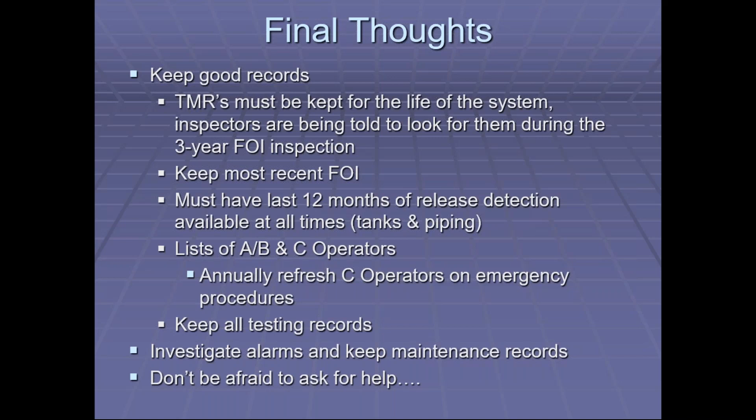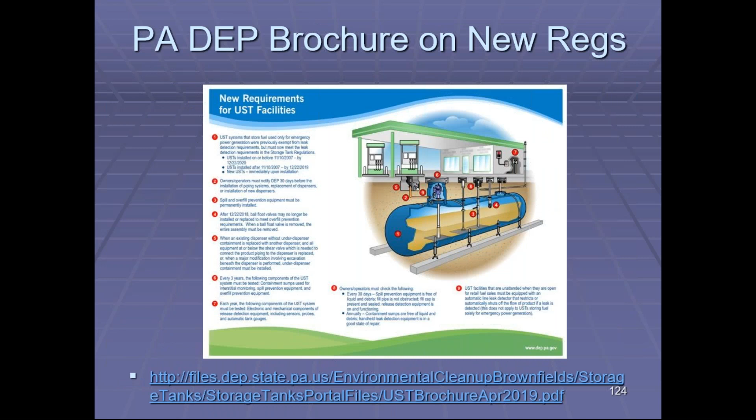And then again, don't be afraid to ask for help from your service providers. EPA has put out a nice brochure that summarizes these new regulations. Pennsylvania DEP also put out a nice brochure on the regs. I'm more than happy to email this out to anybody that wants it. There are a number of really good resources that EPA has updated since their new regulations came out.

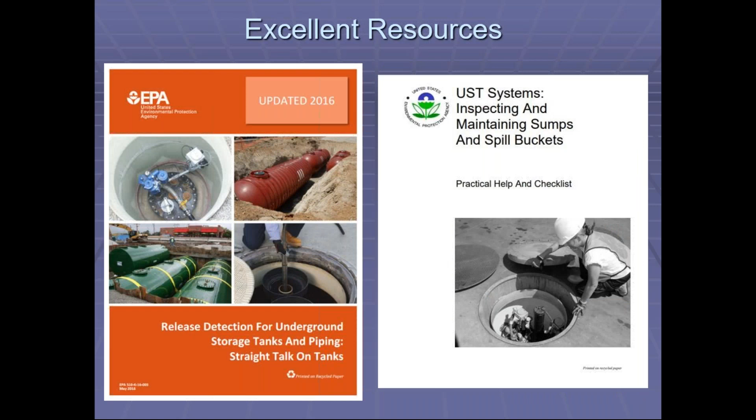These are must-haves for us operating and maintaining underground storage tank systems. These documents are free for download on EPA's website, or you can contact us here at Crompco and I'll be happy to email them to you. Straight talk on tanks, understanding release detection, how to inspect and maintain sumps and spill buckets - there's a ton of good information out there. You just need to go out and get it.

Again, you can download it from the website. A quick note on stage 2 vapor recovery in Pennsylvania. There are proposed rules out there to allow for existing stage 2 vapor recovery systems to be decommissioned. The rules are not yet final, but they are getting close, possibly by the end of the year.

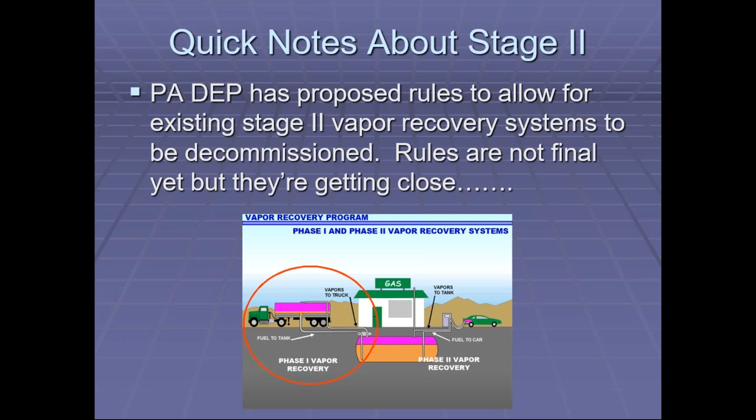But again, the wheels of legislature grind very slowly. We'll see if that happens by the end of the year. But there are proposed rules to allow for stage 2 to be decommissioned. And what they're looking at is requiring vac assist stage 2 systems to be decommissioned by 12/31 of 2022. After decommissioning, doing annual leak testing, pressure vacuum vent valve testing, some general housekeeping requirements.

No testing would be required if you install and operate a continuous pressure monitoring system. I don't really see that happening, but who knows, some might choose to do that. Low permeation hoses, dripless nozzles would need to be installed, so they're looking at that.

If you talk to your friends in some other states, they're doing that over in Jersey right now, requiring that equipment to be installed. Also requiring certified individuals to perform decommissioning and testing moving forward.